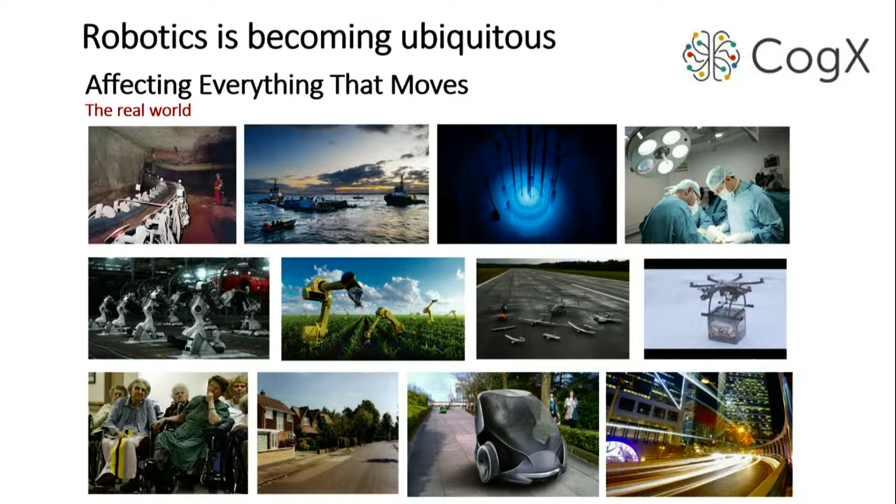One of the challenges is that robotics is being touted as the next big solution across domains, from classical things like manufacturing and industry, where we've seen robotics already make a huge difference, to novel kinds of domains like healthcare, smart cities, and areas where humans don't want to have their presence - for example, the inside of a nuclear core. So we're seeing scenarios where humans don't want to actually go in and intervene, and we need robotics as a solution to achieve some of those tasks.

Looking through the areas where we are already seeing a huge impact, we are looking at robotics helping in areas for food security. We have an inverted pyramid in Western society - the aging population and healthcare challenges are massive in terms of solutions we're looking for. And we have an ever-growing industrial demand. The real challenge is to achieve this without destroying our environment. So robotics is playing a huge role in achieving all those goals.

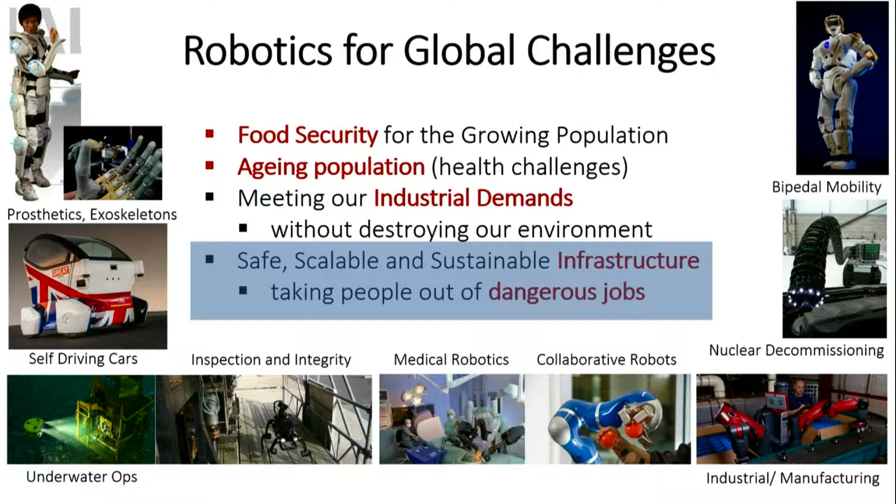But today, I'm going to focus on the last bit, which is safe, scalable, and sustainable infrastructure - looking at scenarios where robots can play a huge role in taking people out of dangerous jobs. That's what I mean by robots in extreme environments. This could be inspecting scenarios where going there can be dangerous, dirty, or really hazardous environments.

You can see some examples of things like inspection integrity and nuclear decommissioning - these are all areas where you would rather want to take people out of harm's way. Often you see the debate of robots taking jobs, but actually there are some scenarios where you really don't want to be in there. You want robots to solve scenarios, to be in scenarios where humans don't want to go and intervene.

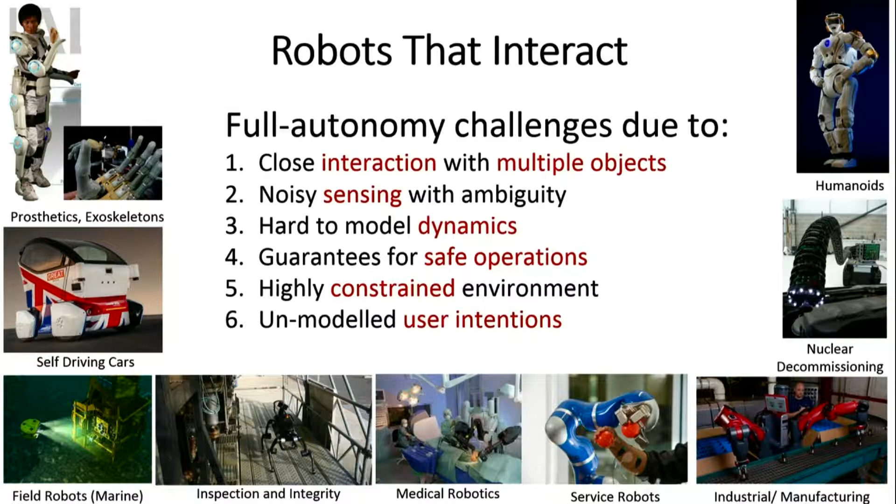So the one question that always gets asked is, why don't we take humans completely out of the loop and get robots to fully solve things autonomously? Let's have machine learning algorithms, the AI, do things in a fully autonomous fashion. That's great - lots of us are actually trying to achieve that goal in various ways. But the real challenge is that because of the noise in the sensing, hard to model dynamics, and complexity of interaction, if we wait for reliable robotic systems to actually work in a foolproof manner, we'll be waiting 15, 20 years. So in my personal opinion, we're going to have to deal with this hybrid scenario, this hybrid setting.

So often I give this example.

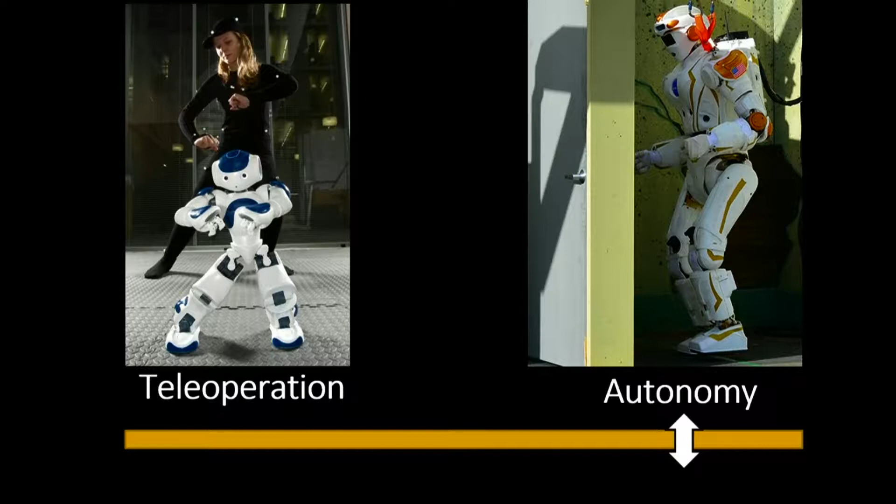So traditionally, when we talked about robotics, we talked about teleoperating systems, where humans or other elements had a joystick to modulate and move robotic platforms, and the robotic platforms would respond in a 100% accurate way to you. You now have research going towards more autonomy, where you're putting significant research into getting robots or machines that can make decisions on its own.

But really, as I mentioned, in the next 10 to 15 years, we're going to see something where you have to deal with something in between. This is what we call shared autonomy. So how do we deal with settings where within a single operation, you're going from teleoperation to autonomy and move the slider across in different scenarios, in different settings?

So here's the first example of one of the projects we're working on, in which we're looking at shared autonomy for remote operations, meaning scenarios which are dangerous for humans to work in. So we have a big project funded through the nuclear agency here in the UK, the National Center for Nuclear Robotics. The aim is getting robots to work in scenarios where humans have no direct line of sight, where there's a possibility of loss of transmission, and a possibility of significant noise.

In these kinds of scenarios, we want a setting where a robot operates in a remote place. It could be another room, it could be another town, it could be another planet. And the person operating it sees a console like this, where you still have human-in-the-loop behavior, where the person says, this is the task, I want you to pick this up and put it there. So that's the kind of high-level human-in-the-loop decision-making done by the operator.

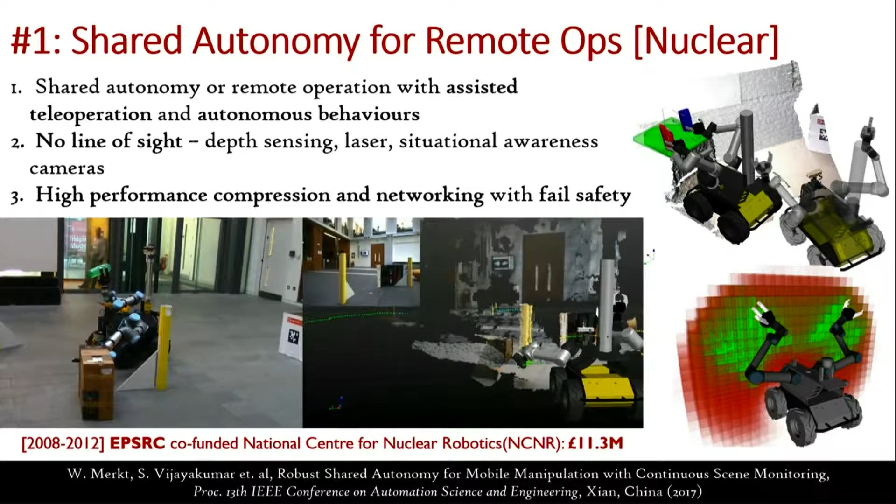But the autonomy, the robot has to still deal with significant autonomy in terms of making local decisions. It has to figure out when to move, how to navigate, how to plan, how to make particular decisions on the fly. And that's the challenge. How can we get reliable machine learning? How can we get reliable data processing to be able to do that so that we can trust these systems and verify such systems in the long run?

So what is the science underlying this? What are the underlying problems that we have to solve from a scientific perspective to achieve something like this? The first thing is obviously sensing. If you look at the world through the eyes of a robot, it's going to look something like this.

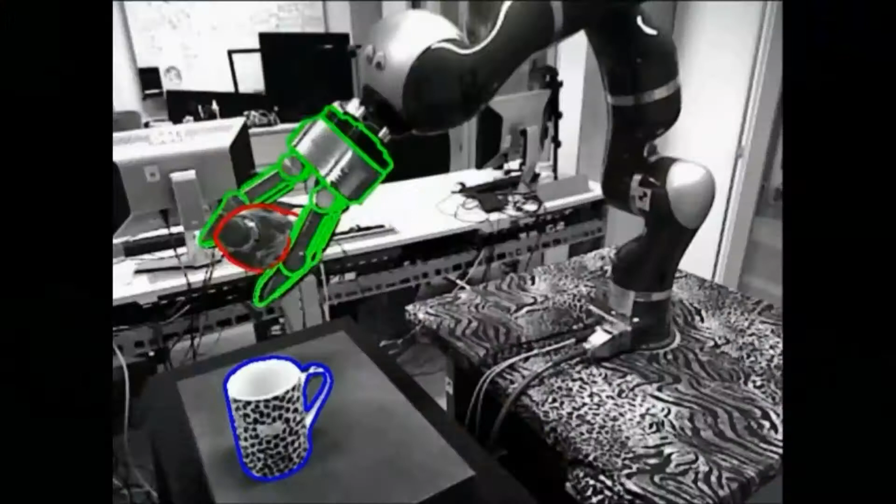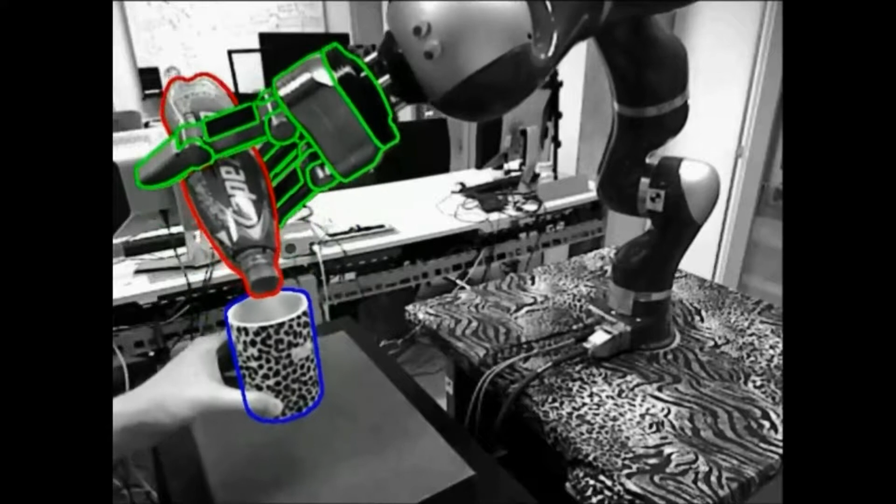Many of you who work in this area will recognize that this is an RGBD image, made of point clouds and some texture information. But going from this kind of raw sensor data to something where you can actually navigate and grasp and manipulate is quite hard. So getting machine learning algorithms to work, for example, tracking objects of interest in real time, and then navigating the world and responding to dynamic behaviors in real time in order to adapt behaviors is quite a hard thing to do.

So just building robots, building hardware, is not good enough. You need algorithms that are able to deal with things like occlusion, deal with noise in the system, deal with cluttered environments, and do this in real time. That's the challenge we are trying to address using these data-driven techniques.

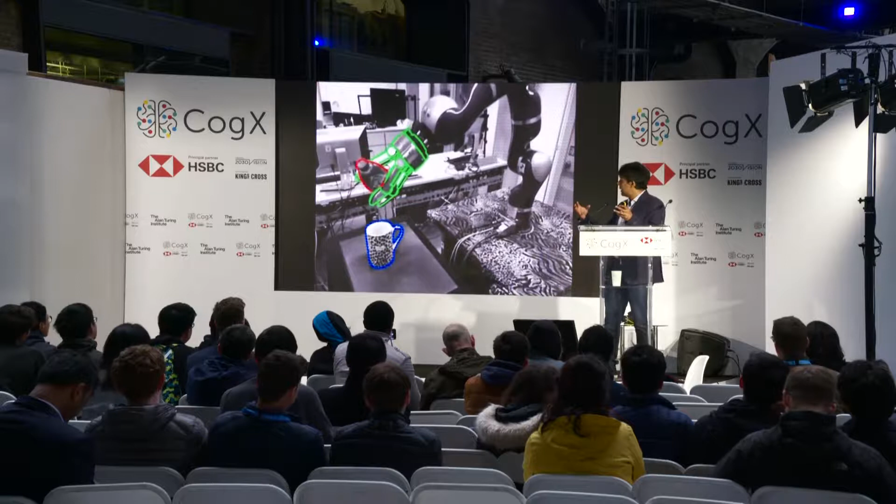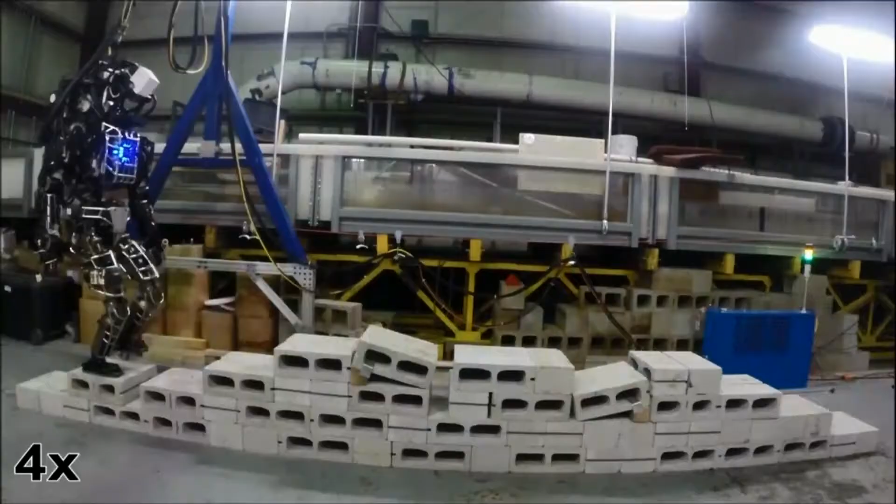So if you now try to put perception and sensing and control together, we can get fairly complex behaviors that we've not seen before, with lots of new advances in these areas. For example, about 5 years ago, we took part in the DARPA Robotics Challenge, which is a challenge for robots to work in an environment with lots of clutter, dealing with settings of navigating complex terrain.

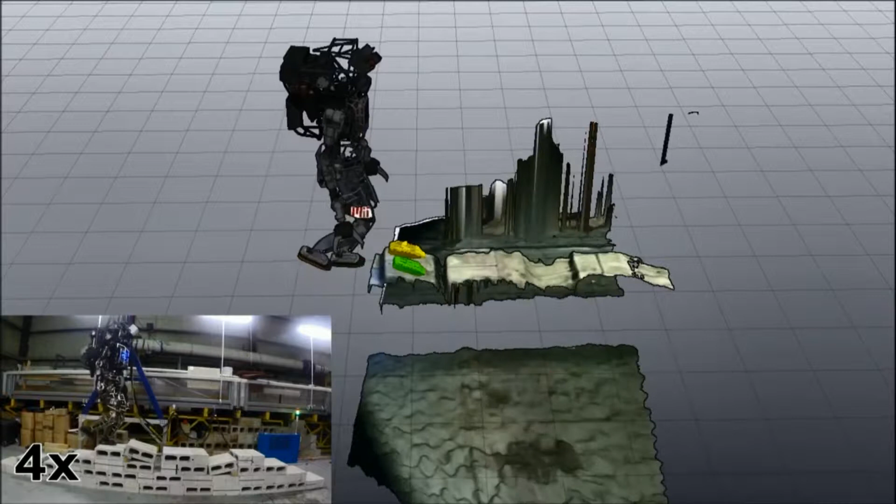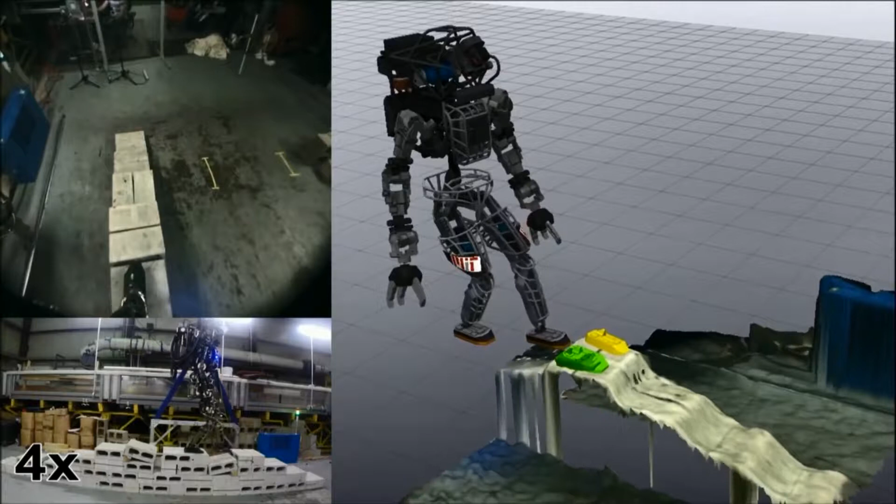So the next video shows you a lab demonstration of a humanoid robot working in those kinds of settings, navigating a very complex cinder block terrain. What you see here is the robot building in real time a local map of the world while doing control navigation in real time. So that's a view of what the robot sees. Believe me, it's much easier for it to fall over than balance very efficiently. And that's the map being built in real time. In terms of the machine learning algorithms, you break it down into what it takes.

You have to deal with reinforcement learning, local perception and vision, and real-time footstep planning. This is what is required for achieving this kind of very complex task. We take it for granted when we navigate novel scenarios, but for a robot to navigate over complex terrain, it's a pretty hard task to do. Achieving reinforcement learning and machine learning for perception, and doing all of that in real time in the control loop, is a big challenge.

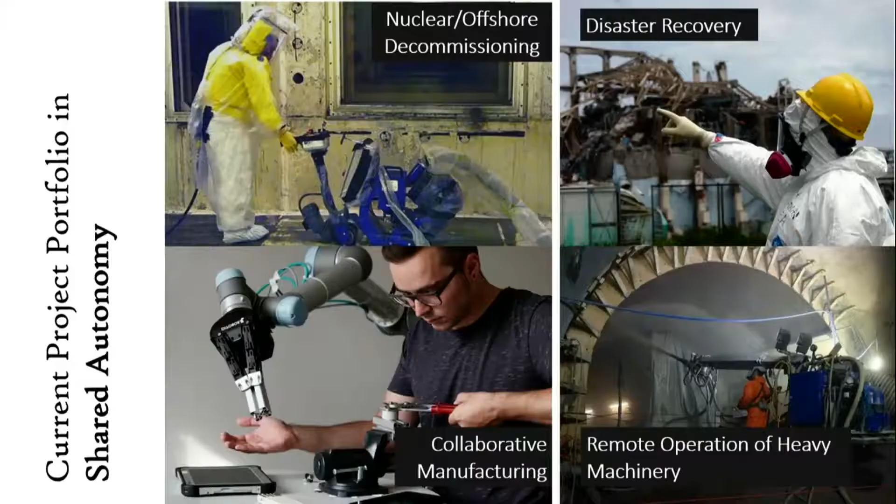That's what we've been trying to achieve as part of the lab that I work in, as well as part of the Turing effort. So where do we apply these technologies? Where do we take all of these sciences, and where are the domains we work in?

These are some examples of the domains we already work in: nuclear and offshore decommissioning, disaster recovery scenarios, collaborative manufacturing. Right here in London there's a big project, a big hole being dug, nearly completed, called the Crossrail project. In Crossrail there's a big challenge: once a boring machine drills through a hole, you have to, in real time, do cement spraying to make sure the integrity of the tunnel is not compromised. For that you need heavily skilled workers.

But if you use technologies from data-driven AI with real-time sensing, you can create scenarios where a much lower skilled worker can operate a joystick, operating a cement spraying device, while ensuring you're not doing something disastrous. This is the concept of shared autonomy, where you exploit the smarts of the sensing while the intention of the action comes from the human.

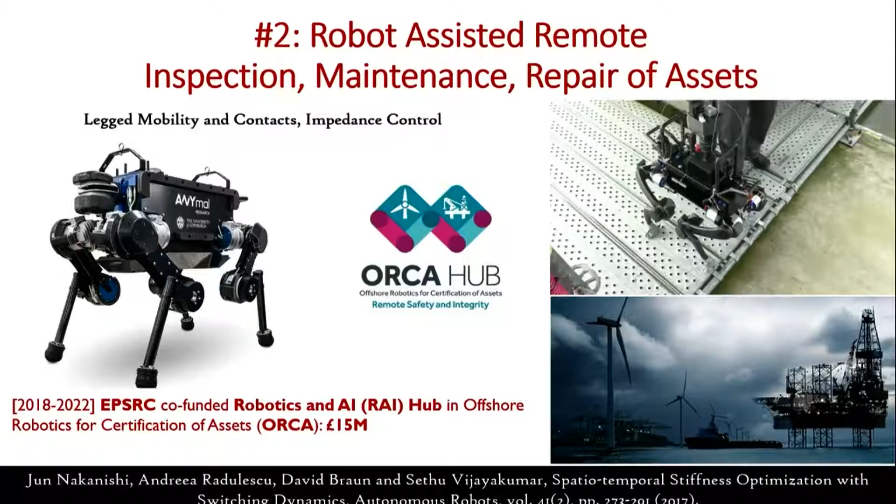Another example is in the area of inspection, maintenance, and repair. We are constantly building and creating complex structures, whether underground metros, high-rise buildings, or mines, and managing the integrity of these structures is getting really hard. How do we guarantee that the next metro you take is safe, inherently safe, it's not going to collapse? It's getting physically impossible for humans to do that kind of integrity and asset management.

So what we're doing is creating robots that can navigate complex scenarios. This is a particular example of a robot navigating in a mock-up of an offshore oil and gas platform. Wheeled robots cannot navigate very complex surfaces, but here's an example of a quadruped robot navigating surfaces that are rather complicated for wheeled robots and sometimes even for humans, because it can be slippery with wet surfaces.

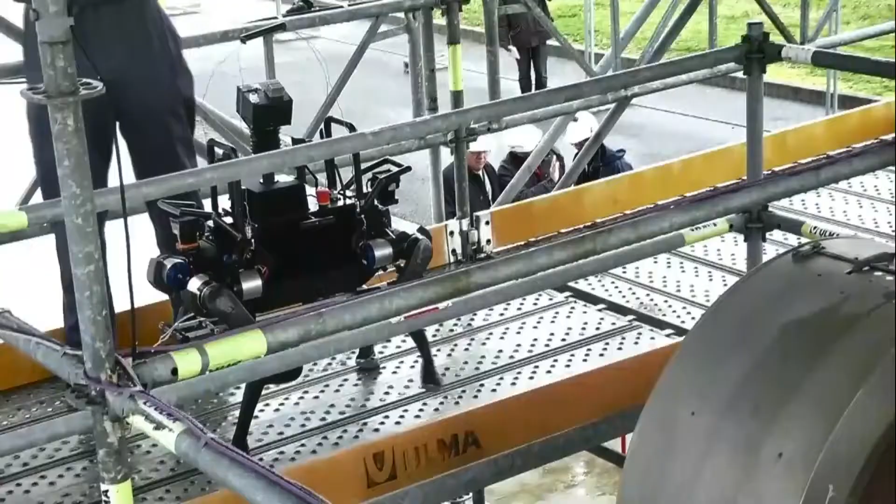So it's navigating and moving sensors around in order to get an idea of the complexity of the surface around it, do asset integrity checks, and report back to the human about intervention. This is an example of how we can really tackle this kind of problem. And if you again look underneath the hood at what science is needed to achieve that...

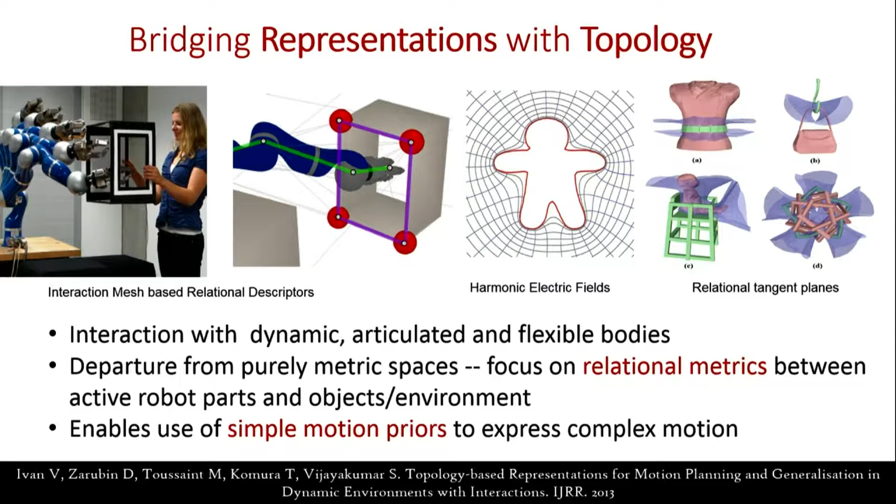One of the things you need to deal with is in the area of topology. If you're working with environments that are very complex, with lots of complex surfaces, you have to work with bridging representations between robot speak and human speak. Let me give you a simple example: if you think about a robot reaching inside a box, you can do it in many different ways. But if you use concepts from topology, then when a box moves, the concept of what is inside and outside the box moves with that topology. So you can adapt the motion of the robot to this novel, changing environment.

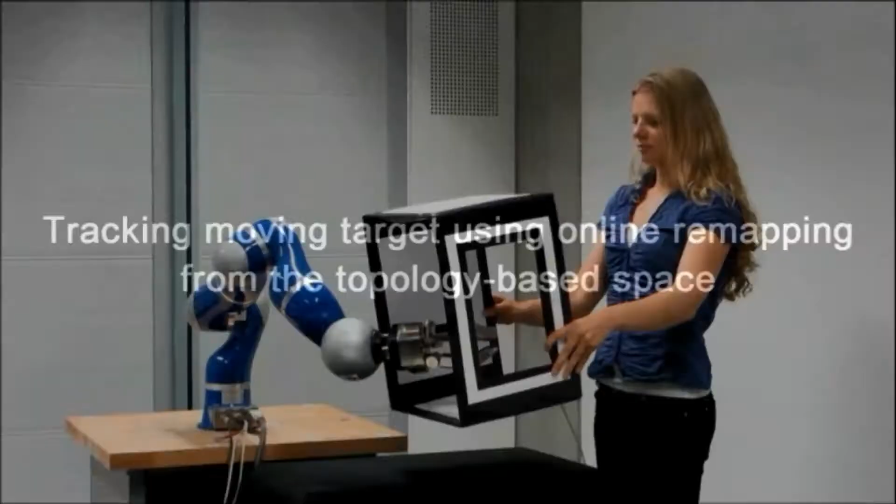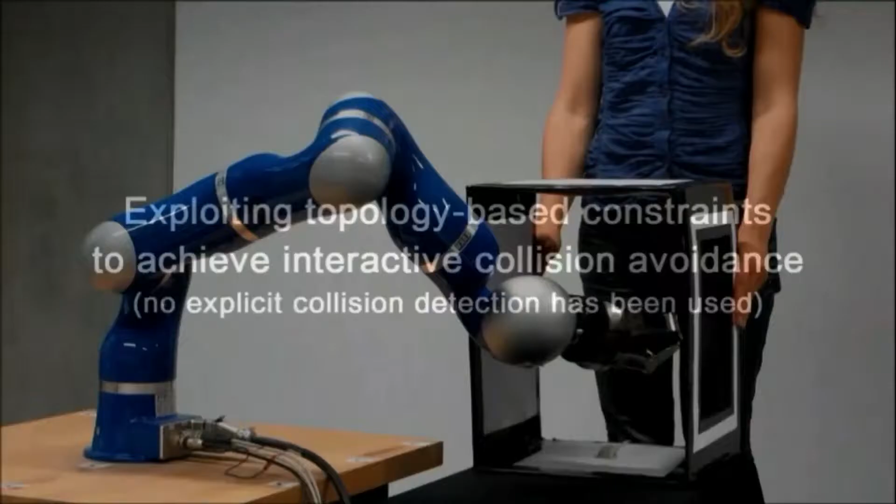And that is really the challenge of addressing that in real time. Here's an example of a robot arm reaching into a box. Again, you can do it in many different ways. But if you try to use this concept of topology, the concept of what is inside and outside the box moves with the topology. So we can effectively, in real time, replan such a task in order to deal with constantly changing environments. That's one of the challenges in dealing with real-world environments.

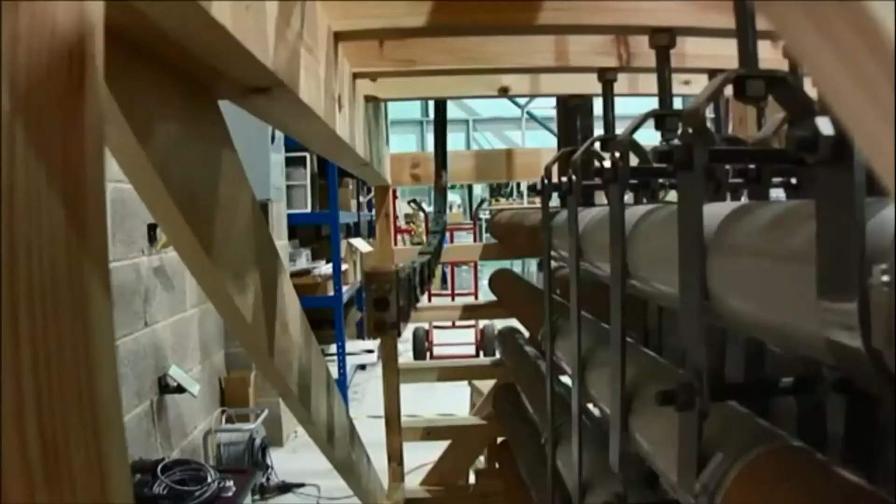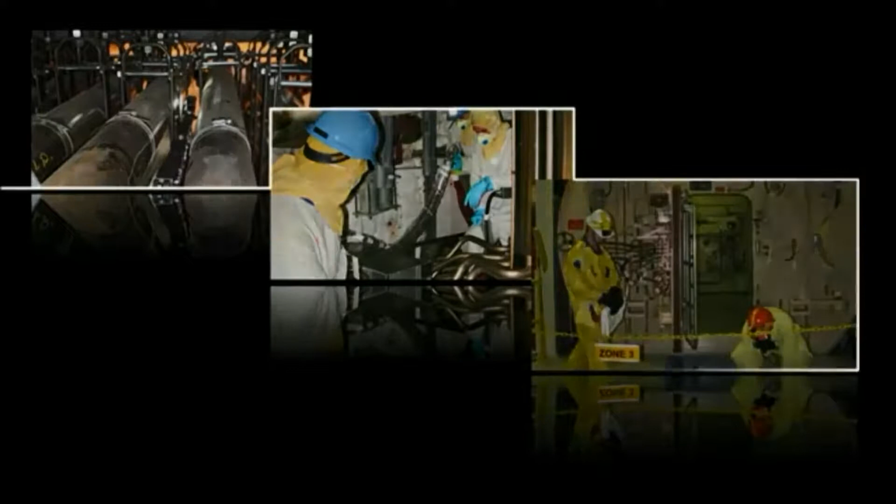This kind of work we've been using in various domains, for example, in snake-like robots for inspection of various structures around settings like an offshore oil and gas platform, inside a refinery, even asset inspection, tool welding and cutting in complex scenarios, and also looking inside an aircraft engine for inspection.

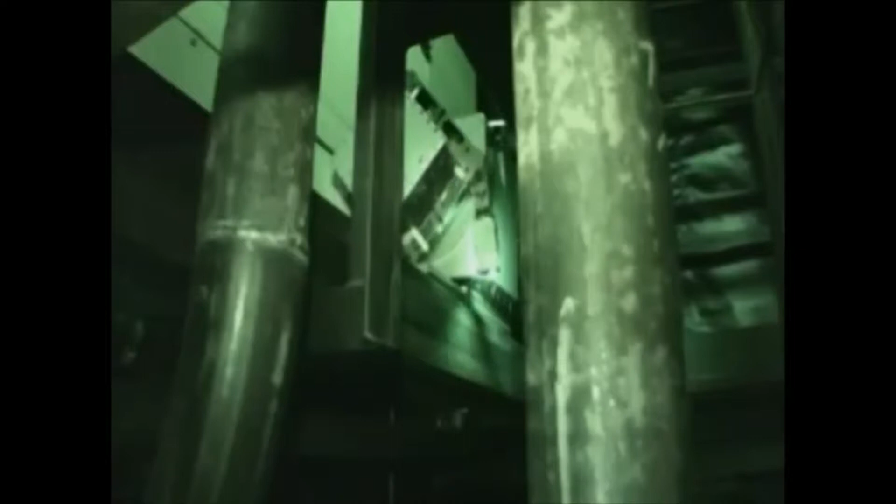Earlier you would have to dismantle all of the structures before we could actually do this. But we're able to work in such complex environments because of working with topological constructs. That's the challenge of bringing together real-time planning, AI and data science with working in complex environments like this. The other important aspect is working with robots that are inherently safe.

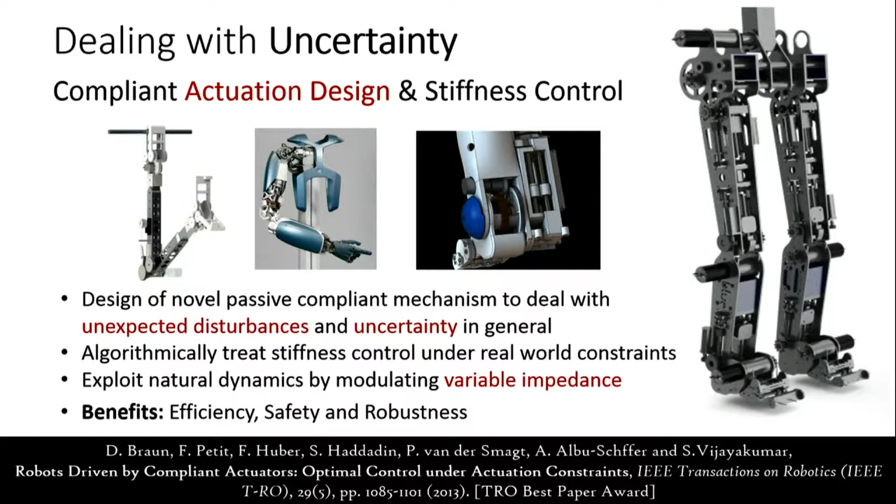That's the big gap between robots that work in laboratories and deploying this in real-world environments. One of the things we've been looking at is working with compliant actuation. In layman's terms, it's putting a spring in between a motor and an end effector so that it's inherently compliant. Getting that to work in real time and addressing some of the challenges is a big push.

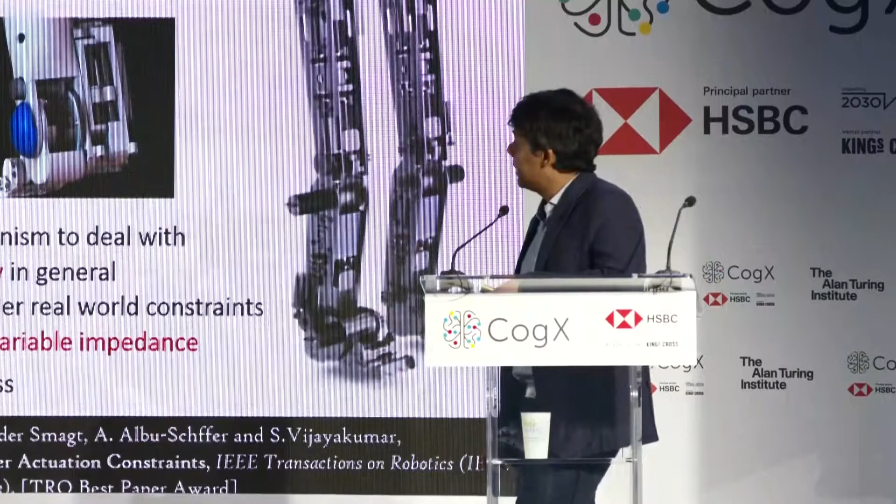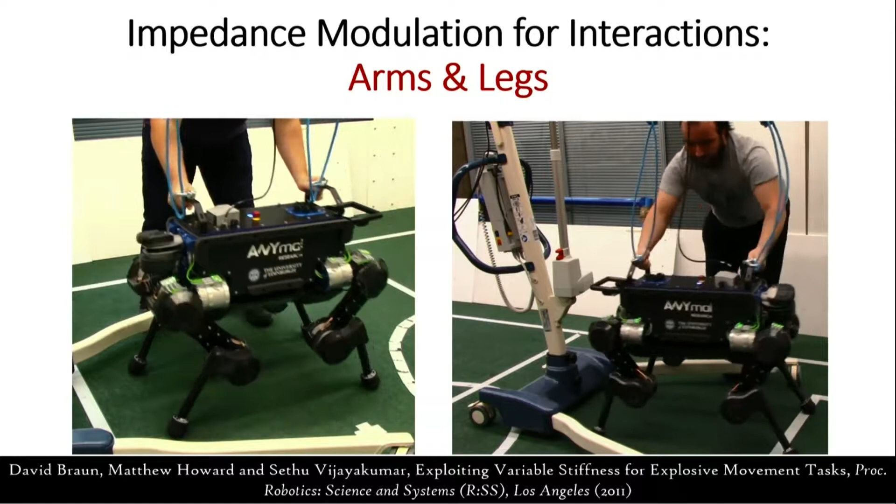Again, you saw this robot inspecting structures in offshore oil and gas platforms. Earlier, we would have to separate the human and the robot working separately, but now we can create what we call compliant actuation mechanisms, where in spite of the fact that the robot is so powerful and strong, it is inherently safe to interact with. That's the kind of technology we need to build, based on real-time sensing and machine learning approaches to deal with safety in these kinds of systems.

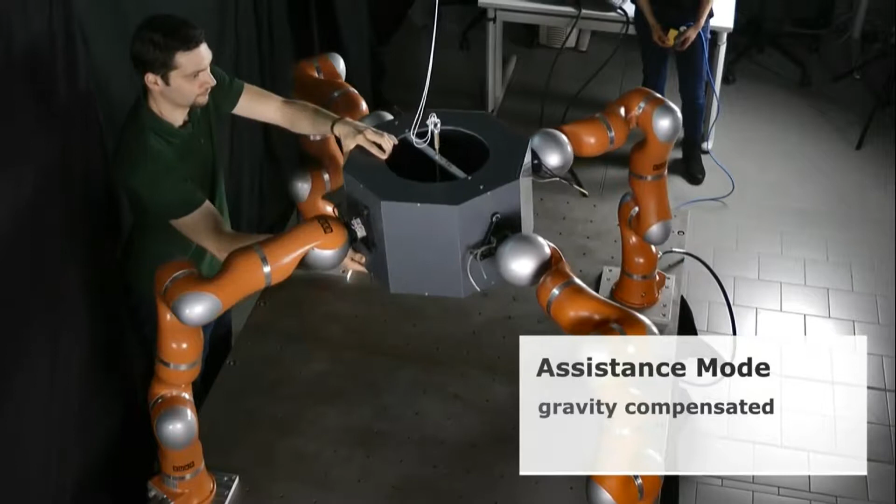This same approach can be used in collaborative settings where multiple decentralized robots are handling complex scenarios, in this case managing a load in collaboration with a human. So again, the challenge is how do we get robotic platforms to work in settings that are really hard for individual systems to work in. Can we get collaborative robotic platforms to work in real time with real-time sensing?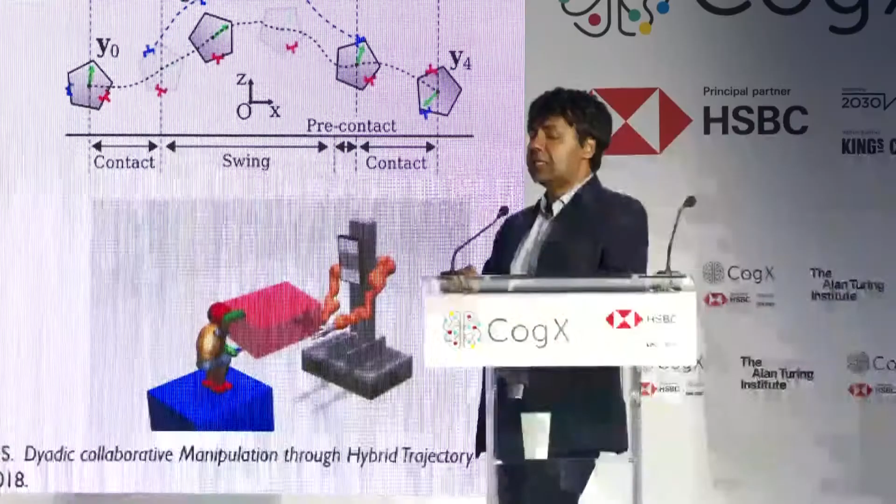Where do these kinds of things go into? I mentioned getting people out of harm's way, getting people out of dangerous and difficult jobs. One of the biggest problems in industry today is worker fatigue and worker injury in dealing with really heavy machinery and heavy equipment.

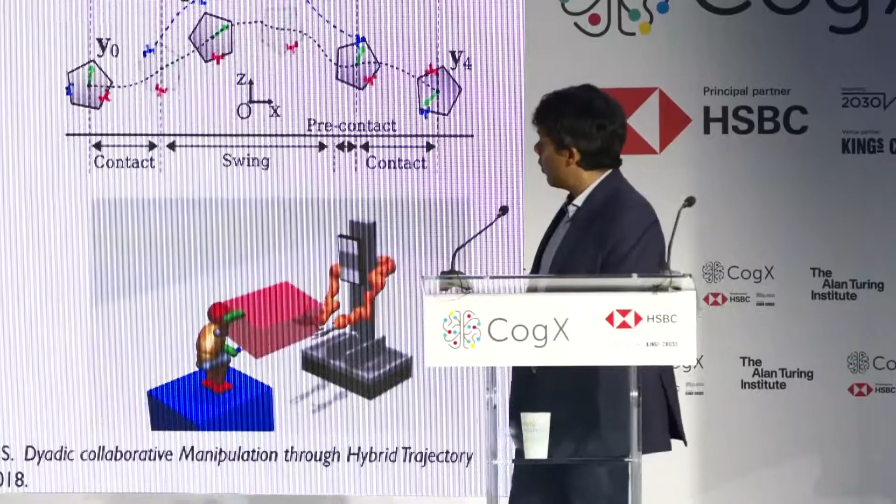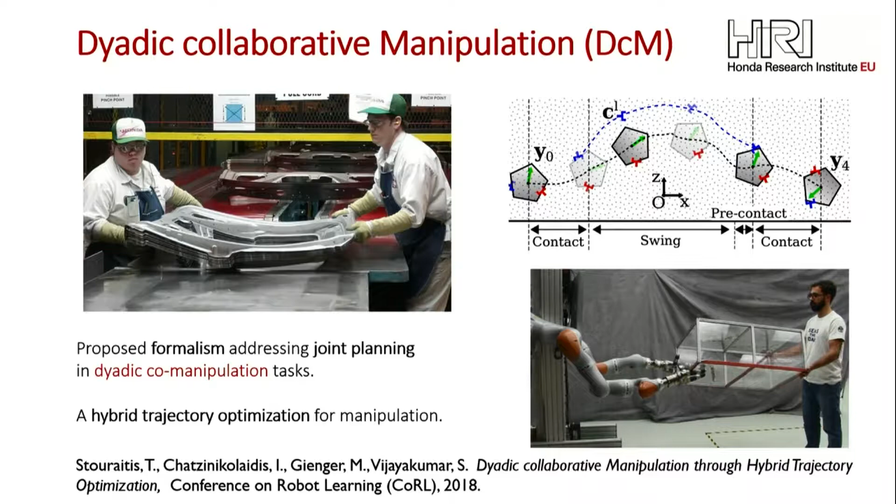So one of the things we're doing, working with Honda, is to try and work with robots that can do collaborative work - not just two robots working together, but robots and humans working in collaboration to achieve a complex task, so that the robot can take the heavy load off the human.

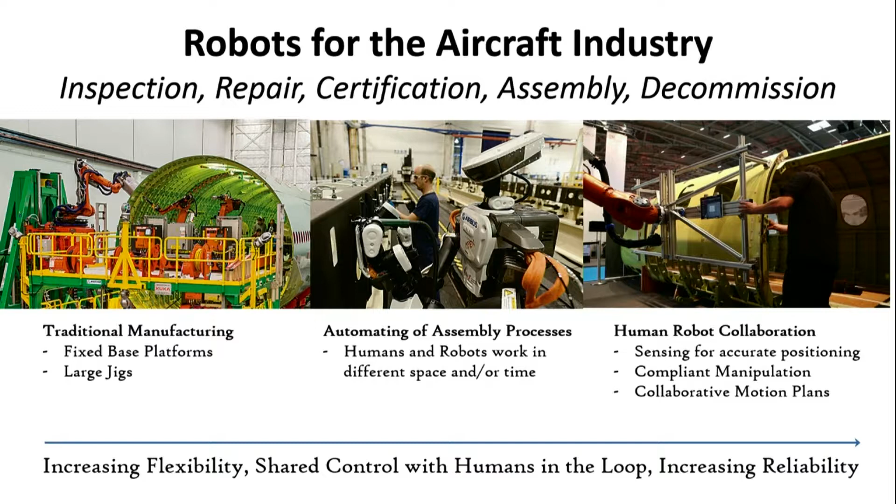The intention of what needs to be done comes from the human. This is particularly useful in high-value manufacturing - for example, if you try to get robots to achieve manufacturing in the aircraft industry. That's what happens now, and that's where we're headed in the new factories of the future. Robots and humans working together to achieve highly complex maneuvers and get the best of both worlds - humans providing the intention and the robot achieving the precision.

This is where shared autonomy comes into the picture. We have projects with Airbus and some companies in China, COMAC in Shanghai, working on this kind of project. Another example I want to briefly mention is extreme environments - space is another extreme environment.

Space is a particularly interesting environment because that's where human exploration and ingenuity comes into picture. At the moment, you probably heard the news a couple of days ago that NASA decided to open the ISS for tourism. So if you've got £27,000 a day to spend on your hotel charges, you could spend it on the ISS.

But actually, the space debris is creating lots of problems. Space debris is creating high risk for people maintaining the ISS. These days, if an astronaut has to do a spacewalk, they actually have to find the right time and the right space with appropriate protection.

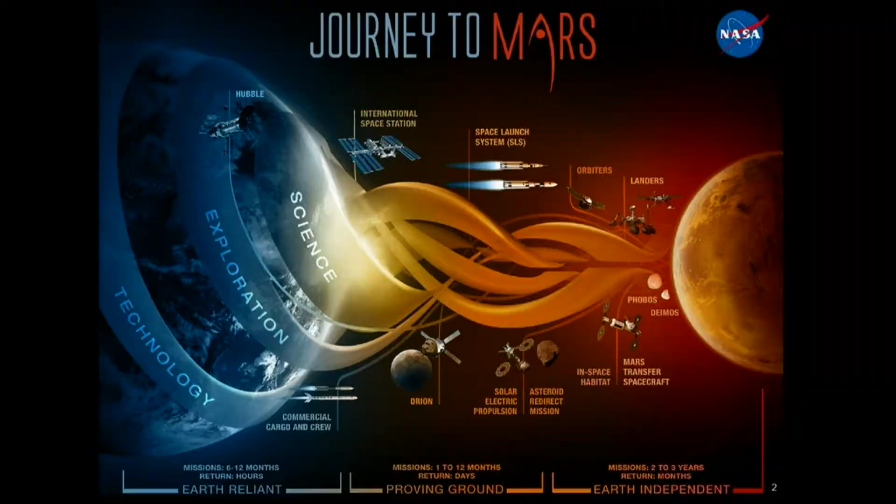With an aging society, one of the crazy thoughts you might have is that as we grow old, living in microgravity may help alleviate some of the problems of living in a full gravity setting like Earth. So if you could create a habitat on Mars which works as good as Earth, maybe that's not a bad option for somebody who has problems living in a high gravity environment like Earth. So that's just a vision.

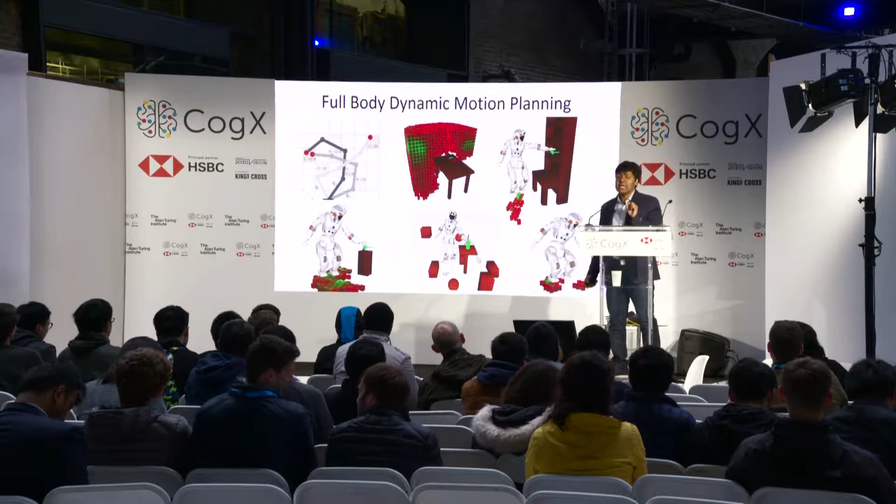But to achieve that, you have to address many problems. One small part of the puzzle is getting a humanoid robot like this working in environments built for humans. Here's an example of a humanoid robot we work with in Edinburgh. It's called the NASA Valkyrie humanoid.

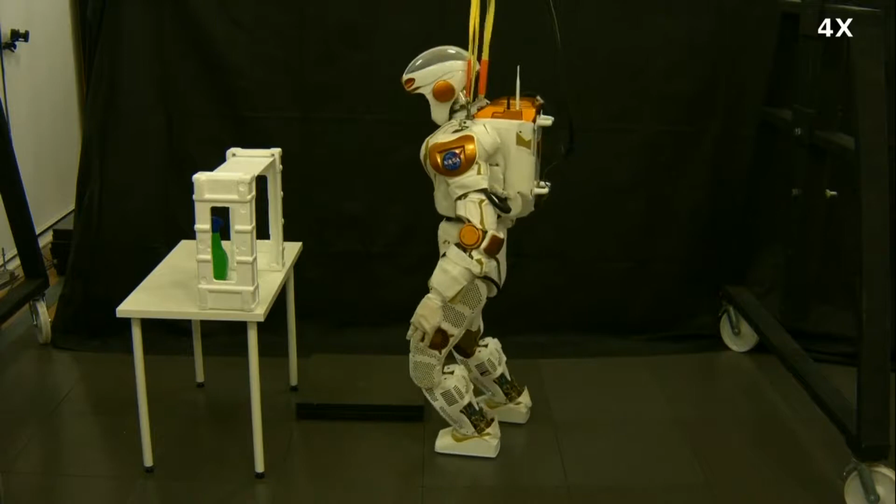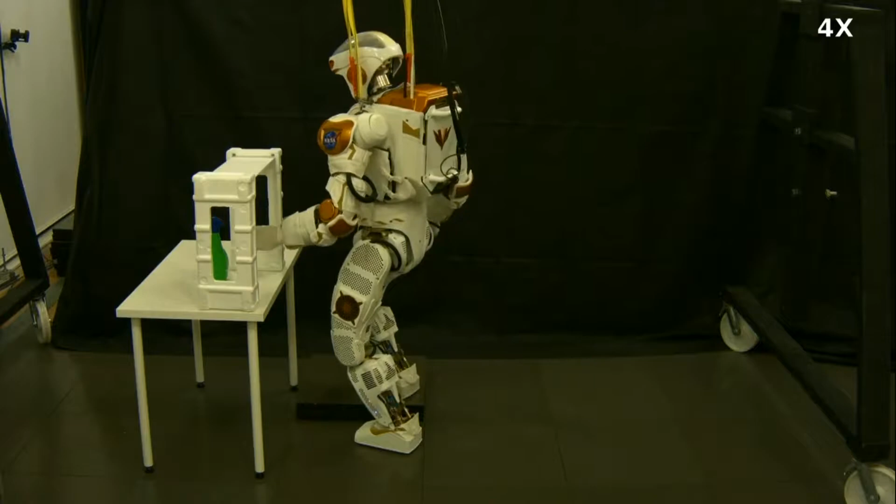One of the aims is to get it to autonomously navigate, locomote, grasp objects, and do real-time sensing, all of this locomotion in real time. So it's a systems challenge, because you have to put together all of that control, planning, and navigation in real time.

But the real challenge is, can we get this to do it robustly with minimal human intervention, can we build in significant autonomy into the system so that it can work without real human intervention. So you'll see in a moment the kind of sensing the robot uses.

This sensing is exactly the same technology used in autonomous driving cars. Here's the robot looking around, building a map of the world, and then using it in real time to navigate. If we get technology like this working in real time, then we can potentially address some of the challenges faced by autonomous driving cars at the moment, in terms of robust navigation and robust people detection, for example.

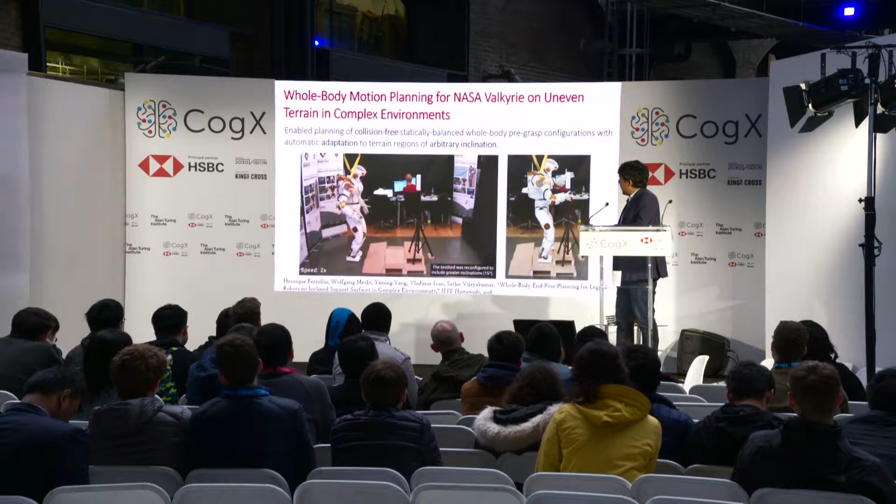This is another example of a robot walking on uneven terrain. Walking on flat ground is easy. Walking on uneven terrain, climbing steps, using real-time navigation, is pretty hard, but that's the science we're pushing to address.

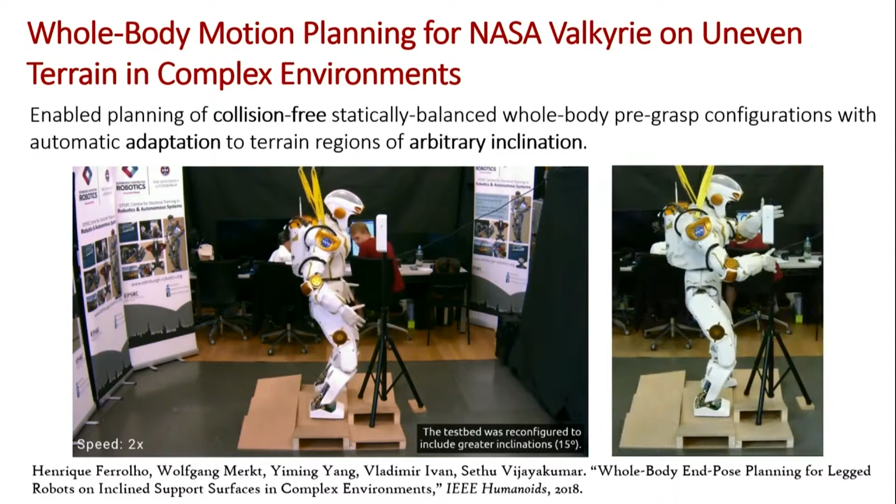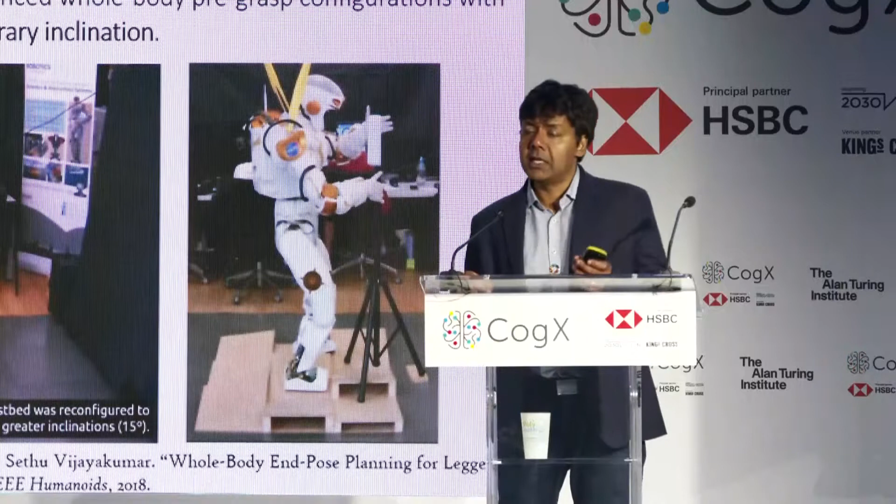And really, it's not just in space that this technology matters. Making advancements in this area makes a huge difference in terms of pushing it into things like autonomous driving cars and making behaviors much more reactive in those settings.

Okay, so the last thing I want to talk about today is shared autonomy in healthcare. And for this I'll need a couple of volunteers, because I have a live demo that I want to try on you guys.

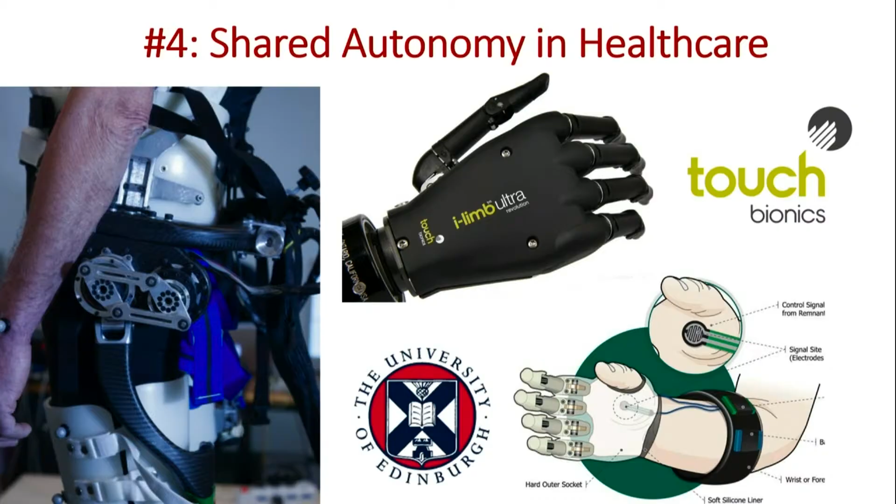In healthcare, again, it's the same challenge. We are never going to get to a stage where we have the need for fully autonomous robotic platforms. And often in healthcare, we're never going to the scenario where we have 100% teleoperation, because typically robots will be needed in scenarios where people have lost certain ability, either physical ability or some neural degeneration or some other kind of illness. So you will always be in this hybrid setting. And that's where the challenge comes in: how do we deal with this kind of hybrid shared autonomy setting in healthcare settings?

So we've been working with exoskeletons, both upper limb and lower limb. Here's an example of some video of work we've been doing with amputees, with the NHS, the National Health Service, on using prosthetic hands with shared autonomy for grasping and manipulation of objects.

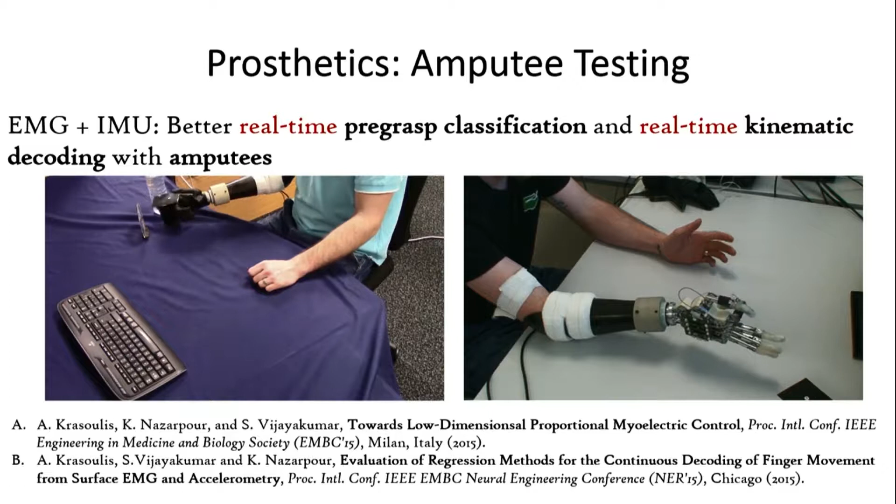What's important here is that it's a two-way communication. The human is still deciding what to do and when. Significant autonomy in the platform, or in the robot hand, is actually doing some of the pre-shaping of the grasps, and then the human control does the rest of the shaping.

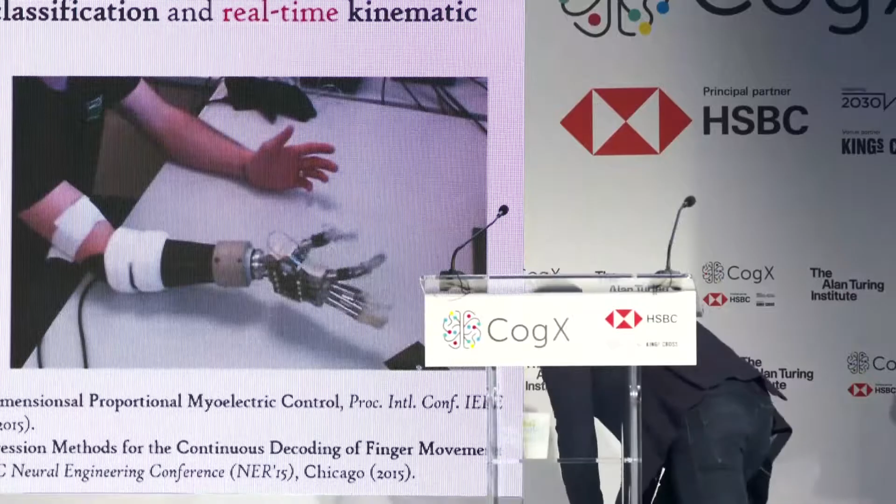So we're going to try and see this in action. I've got this prosthetic hand along with me, so we're going to get a couple of volunteers to come up and test this technology live on the stage. Can I get a couple of volunteers? Okay, I've got one here and one there, right in the front. Okay, if you want to come up.

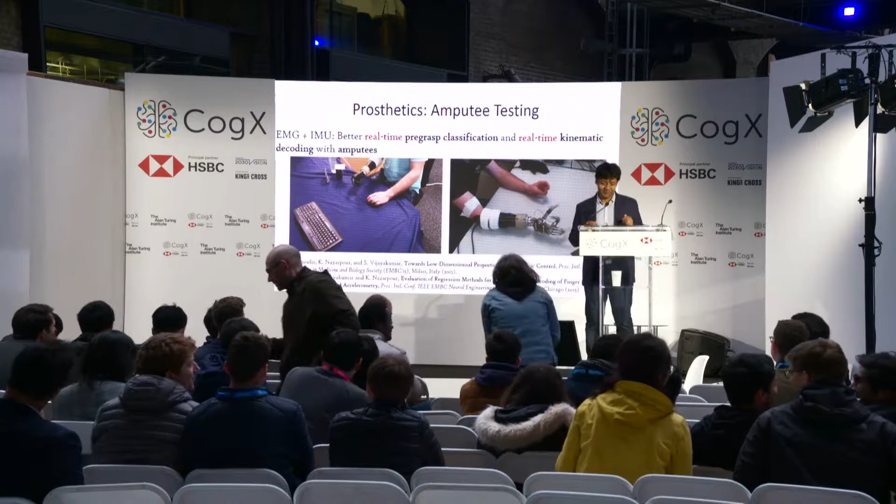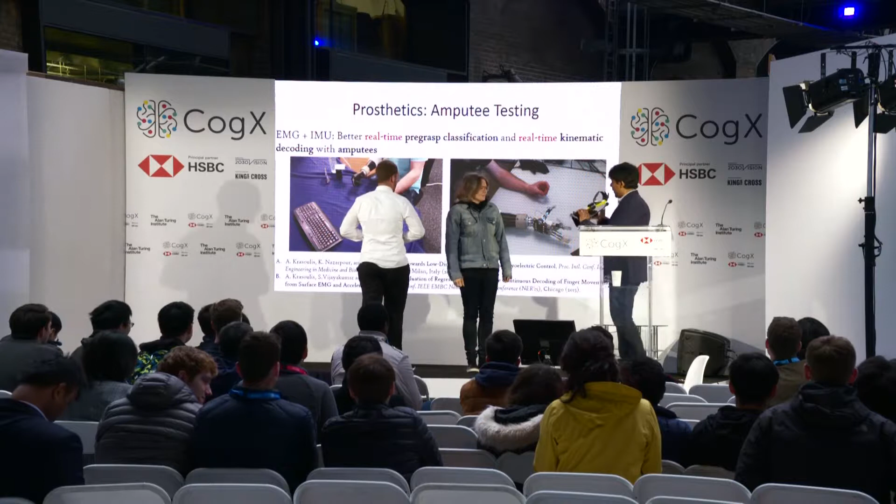If you want to come right up to the stage. Yeah. So, I'm going to get you to wear this. Okay? Is that okay? Yeah. And I'll need you to unbutton your cuff because I'm going to attach the sensor to you there. Okay.

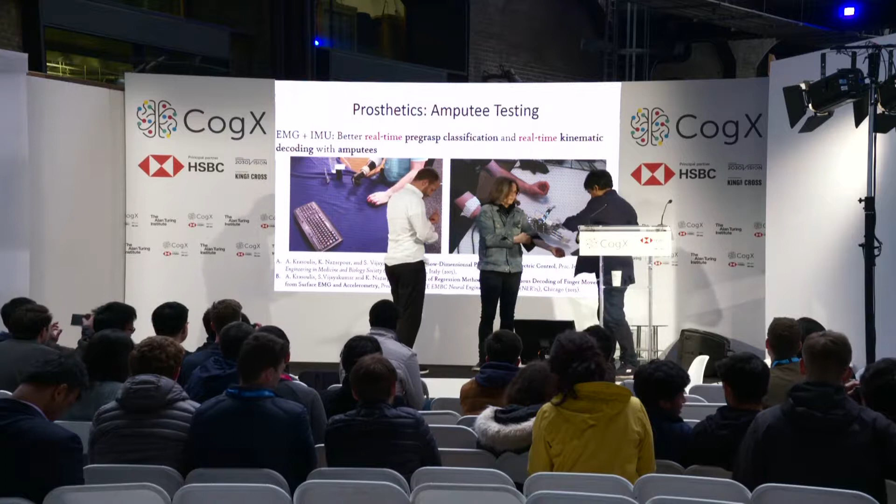Yeah. It's heavier than you think, so you may want to use your other hand to support it. Okay, so if you want to come around here.

Actually, I need to speak into the mic. Sorry, so that's okay. Do you have a handheld that I can use?

In the meanwhile, what you're seeing here is the prosthetic hand that's being used on these amputees, and this is a little mock-up for healthy patients to wear, and this here is an EMG sensor that actually senses the muscle activity of the person wearing this.

So we're going to get you to testing. Perfect.

Okay, great, I'll need an object to grasp. Let me- no, that's too small. Too hard. Yes, you can find- I think I bought a ball.

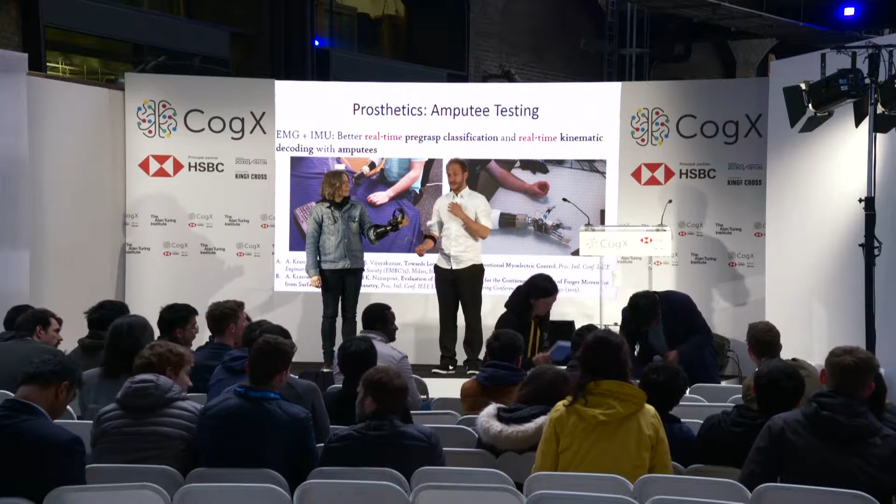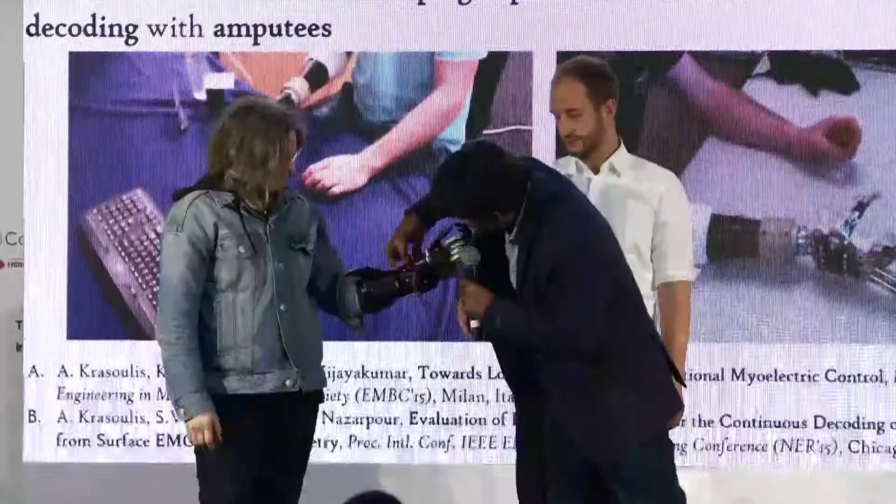So what we're going to do first is I'm going to turn the hand on, and we're going to see if you have a pulse.

Okay, if you now want to try and move your wrist, just your wrist left and right. Okay, again, yeah, all the way, one, yeah. And the other way. Okay, okay, yeah, try again.

Great, so now you can see this. If you kind of lift it up, so that the rest of the audience can see it. So he's now controlling the robot hand using the muscle activity on his hands, and effectively he's just sending the open and close signals, and the robot hand has the smarts to figure out when each of the fingers should stop closing.

So for example, if I now put this in there, and if you try to grasp it, you can see the individual fingers.

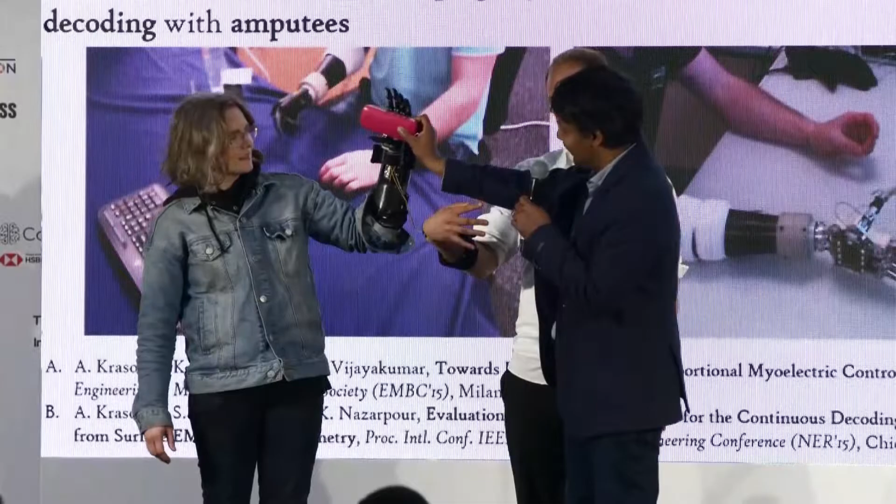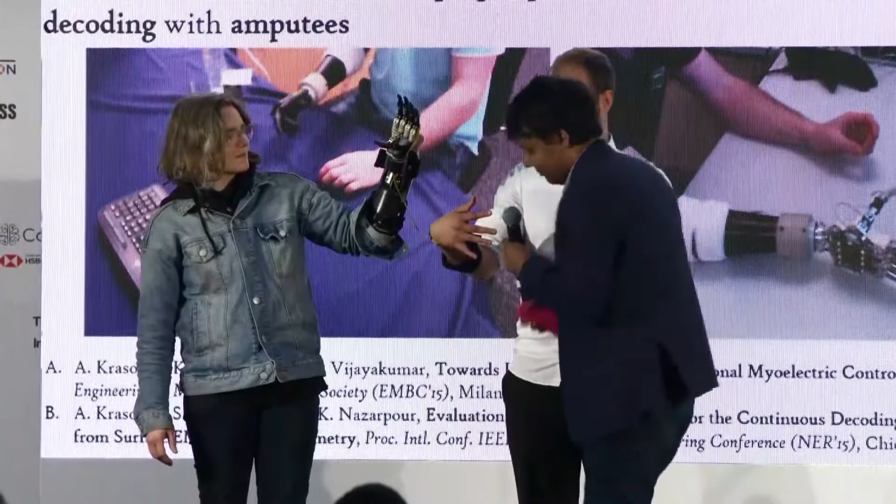Try it, don't co-contract, so be relaxed, and then try and go one way. Okay, try again. You're co-contracting, I think, but yeah, go again. Okay, try again. And the other way. Okay, try again. One more try.

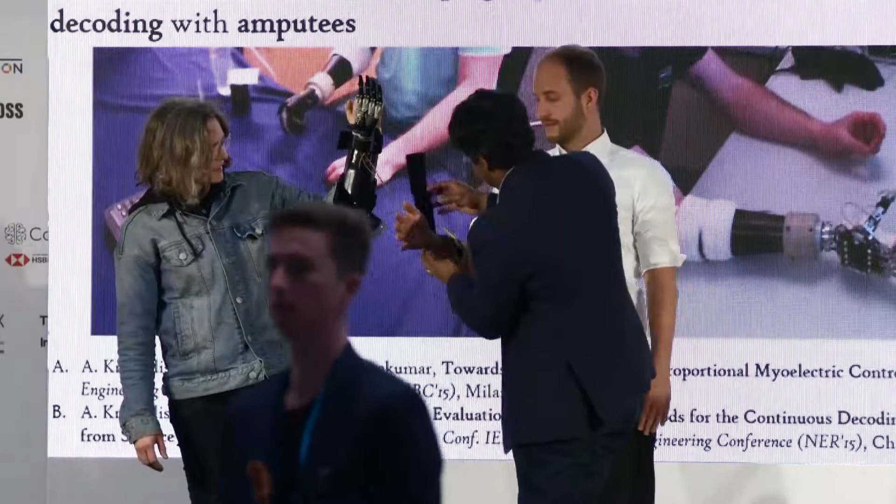We'll try changing the polarity. Try again once more. That was rude. Okay, go for it. And the other way. No? Let me try it.

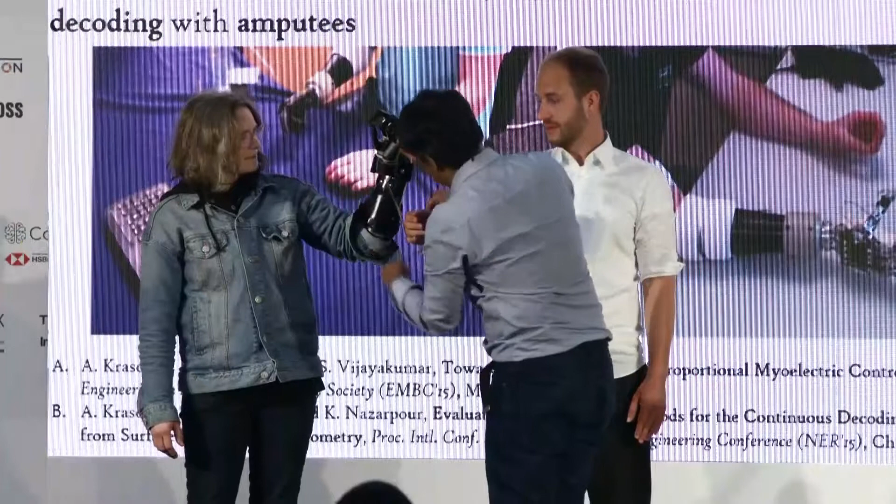So it takes a bit of practice though.

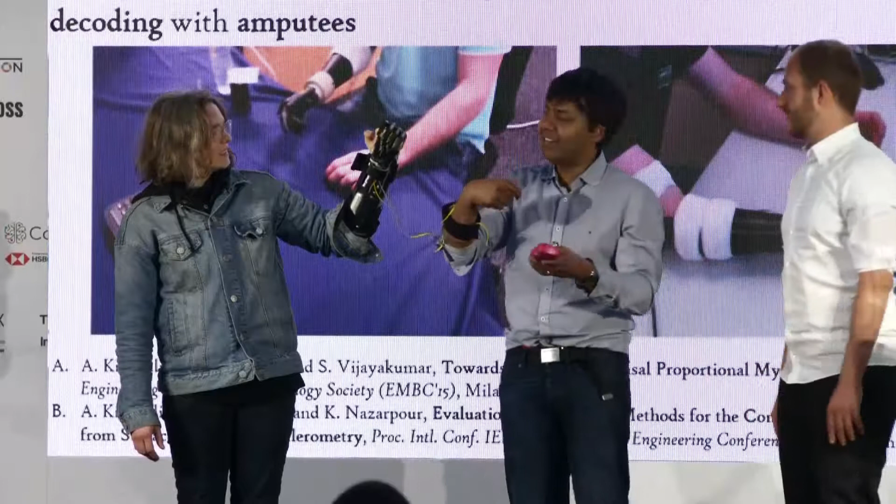So I think you just have to sustain the thing. So what you can see here is now that the individual fingers decide to adjust to the shape.

If you can grasp that ball for me, is that okay? Yeah, and then we try and put it in there. So you can see that the individual fingers decide when it should stop closing. So that's an example of- not quite.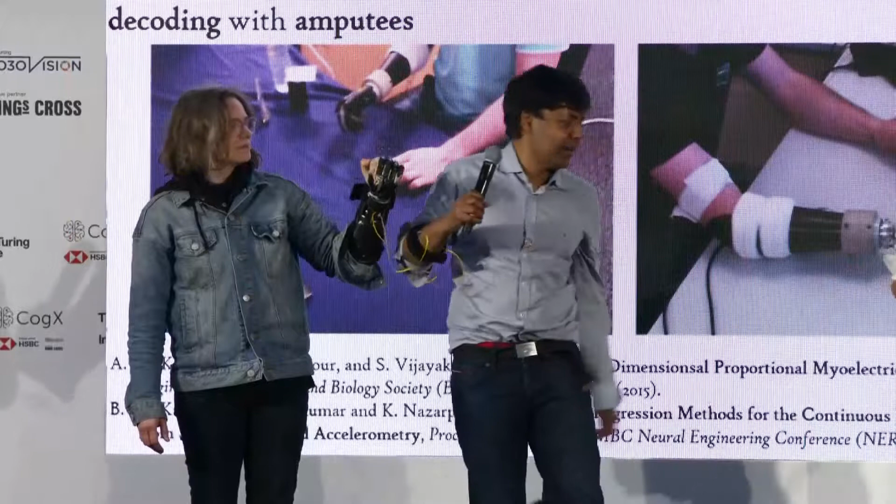Good try. So I'm going to try and show you one more thing. I don't have my phone on me. No, hang on. Yeah, great. No, I needed my phone actually. So it's actually up down there, charging.

Can you grab my phone? So one of the things- what do you need? Just the mic. Of course.

So you've seen here that I am sending the open and close signals, and the smarts in the hand is deciding when to stop closing.

And one more thing we're going to try is now connect using Bluetooth to this device, using my phone to this device. Okay, so let's try that.

And once we have that, okay, it's connecting, and what we can do is pre-shaping of the grasps. So I can now change the shape of the pre-grasp using this mobile phone. So basically, it's a three-way communication between the human, the smarts in the hand, and the device.

So for example, I can now change it to something called the credit card grip. So that's a credit card grip, and you can see that it's changed into a different mode. So essentially, here's an example of a three-way communication between a human hand, the smarts in this, and the device. And it opens up all sorts of questions in terms of security and how to deal with stuff in real time. How do you ensure that nobody can hack into a device like this?

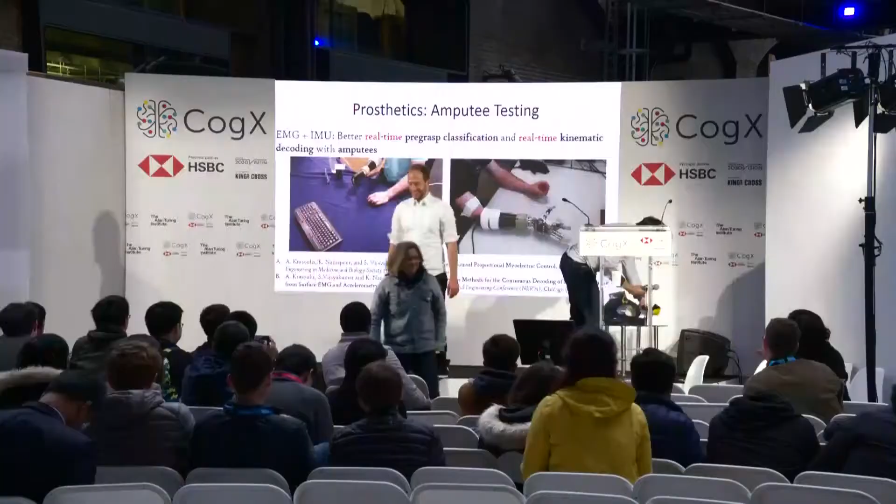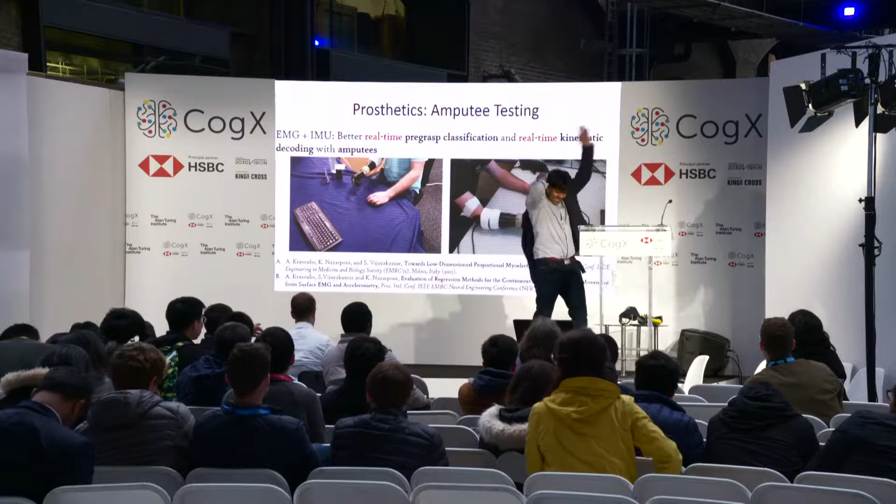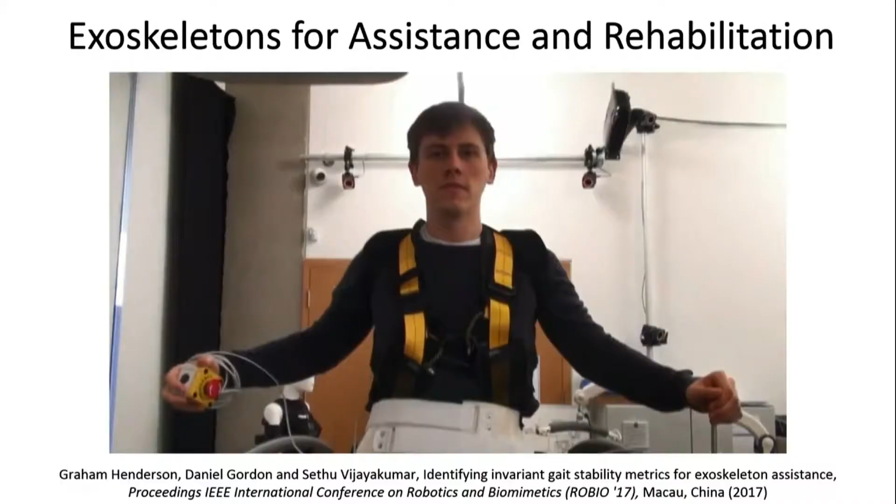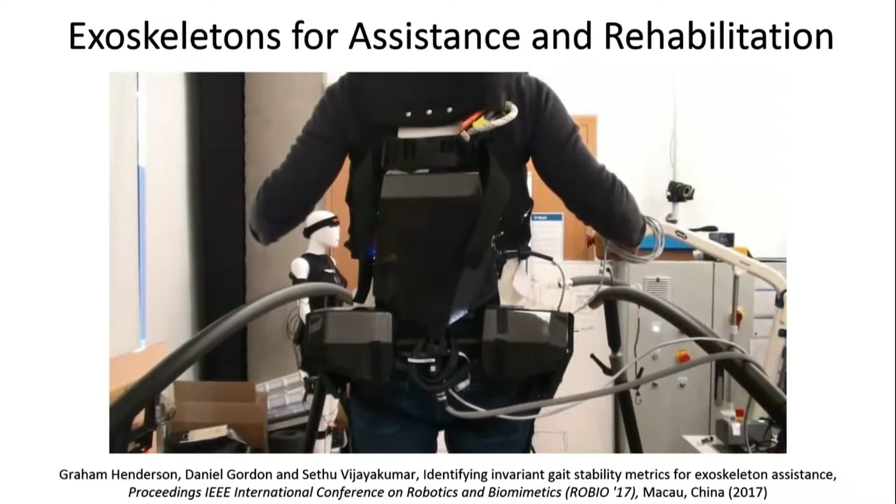Okay, so the same stuff on the upper limb applies to lower limb prosthesis. Here's an example of a person wearing a lower limb exoskeleton, and again the same story of shared autonomy, where there's partial input from the human control system while the person is walking.

So the exoskeleton, the assistive device, applies forces on the person's legs while the person is walking. In case there is a propensity to fall, or fatigue, it can help a person deal with that. It's not just that.

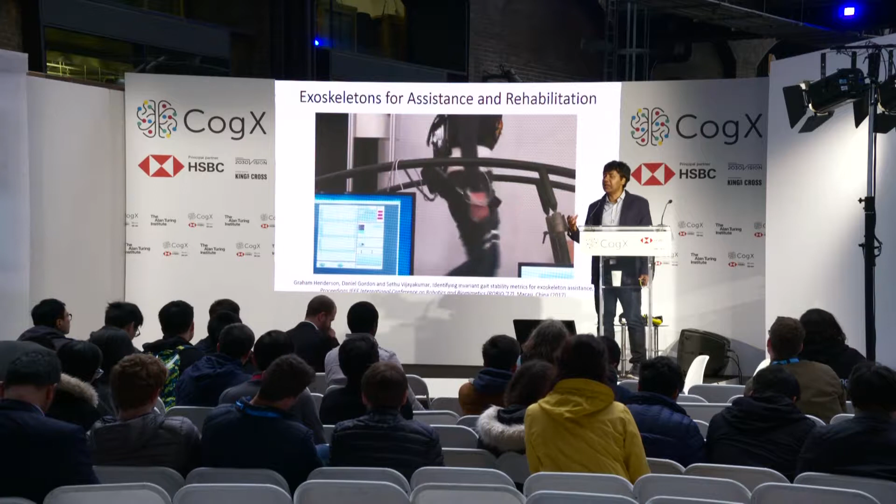In collaboration with the Johnson Space Center, we've also devised a new use for this exoskeleton. If you change the sign of the assistance from positive to negative, making it a resistive device, it's a great tool for preventing muscle atrophy for astronauts on the space station. At the moment, they take a huge rubber band and tie themselves onto a treadmill for walking. Here's an example of using this device to now do resistive activities.

Basically, all the stuff that I talked about in terms of the technology, there are some interesting debates we need to have in order to progress this further. Great technology, lots of work going into good science and good hardware, but when we try to take this technology and deploy it in the real world, there are still many aspects we need to address.

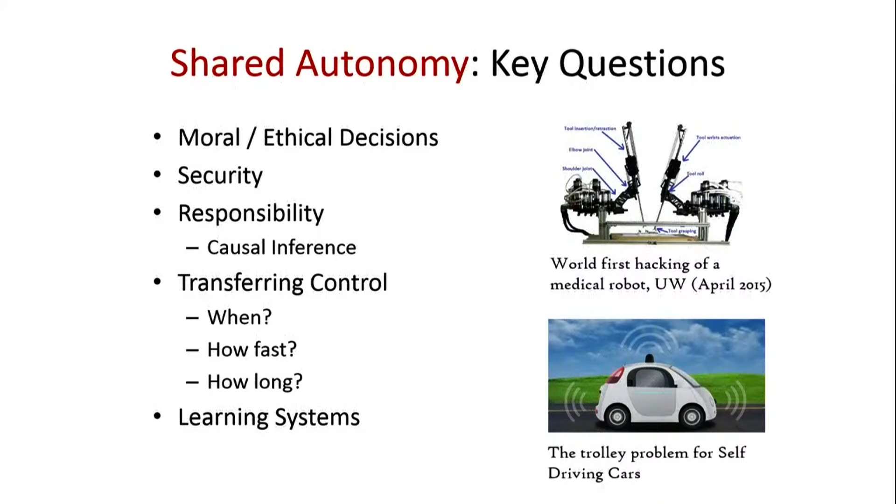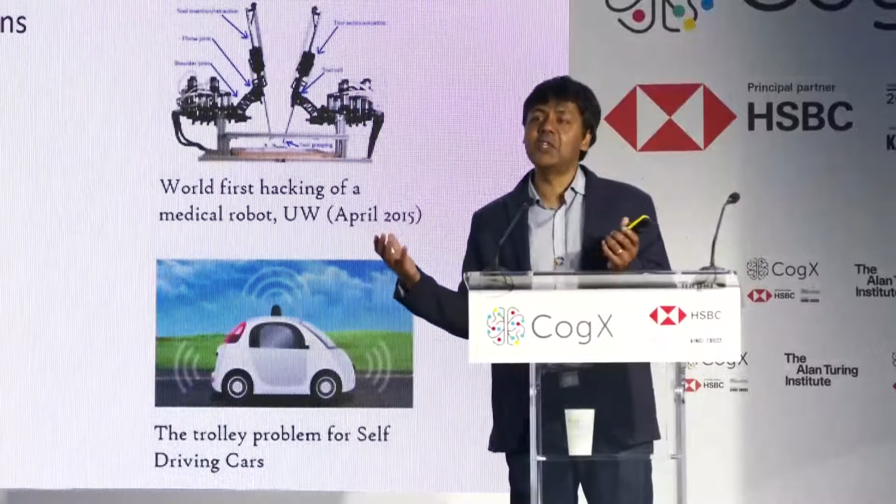The moral and ethical decisions about use of robots in certain scenarios. Security - I gave you an example of how people could hack into a medical device or prosthetic device and potentially change what you do. If something goes wrong, how do we decide who was responsible? Is it the human, the robot, or the manufacturer of a sensor? How do we deal with that responsibility, that causal inference?

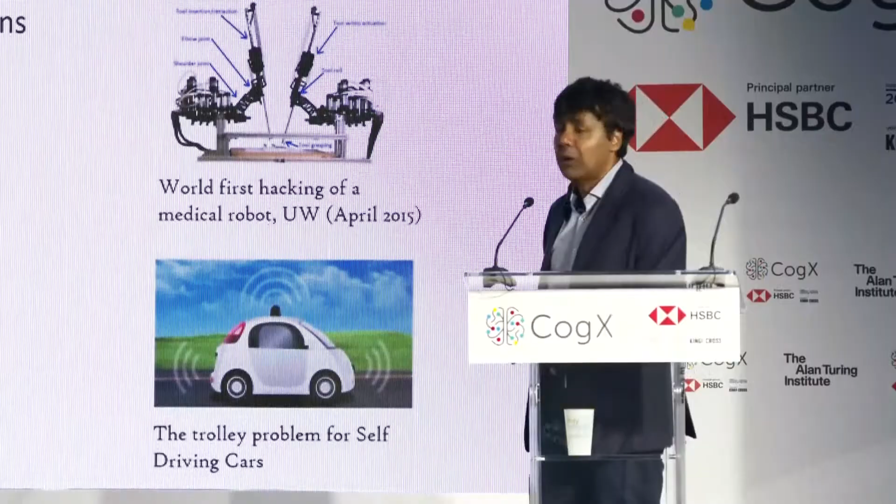Transferring control - when, how fast, how long? How do we deal with these questions of transferring control? And finally, learning systems. It's a great boon to have machine learning, but the moment you've got learning systems, getting really robust, verifiable systems gets much harder.

These are the kind of questions that we're addressing at the Alan Turing Institute, in the Robotics and Autonomous Systems program. One of our visions is to create a world-leading scientific program for dealing with unique challenges that arise from, and towards, deployment of robotic platforms. You saw some examples of robotic platforms, but there are so many open questions that we need to address before they're ready for deployment in the real world. That's what we're trying to address at the Alan Turing Institute.

We do that by funding core science, working with industry - lots of companies like Hitachi, Toyota, Honda, Dyson, DeepMind - and we also work with living labs to do practical proof-of-concept deployments in several of these areas. If any of you are interested in working in these areas, please do get in touch with us. Currently, the program addresses three main strands: scalable algorithms under constraints, multi-agent computations, and verifiable, robust, explainable decisions for the robotics and autonomous systems domain.

These are the kind of areas we're currently working on. We're looking for people and partners to collaborate in these areas, and we would love to talk to anybody who's interested.

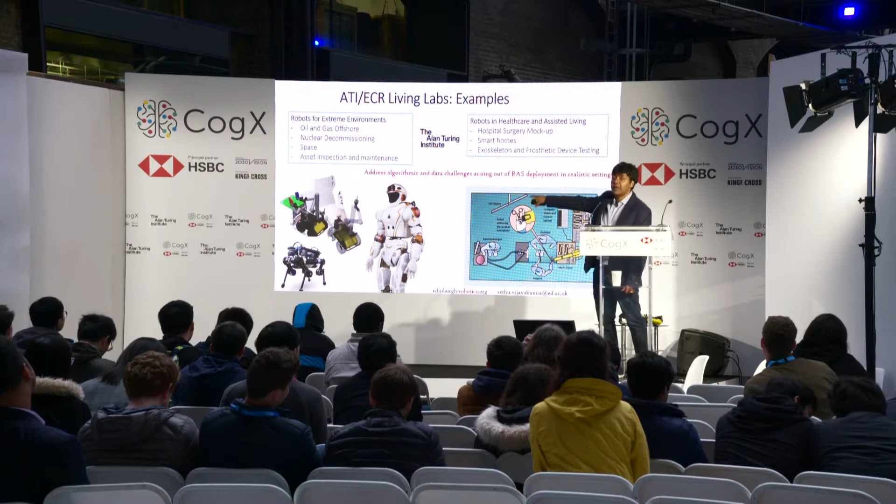Finally, I mentioned living labs. Spread across the UK - in Edinburgh, Bristol, Oxford - we've got various places where we're actually de-risking technology using living labs across different environments. I've talked only about robots for extreme environments today. There's other work on robots for healthcare and assisted living, etc., going on. This kind of effort is happening across these domains.